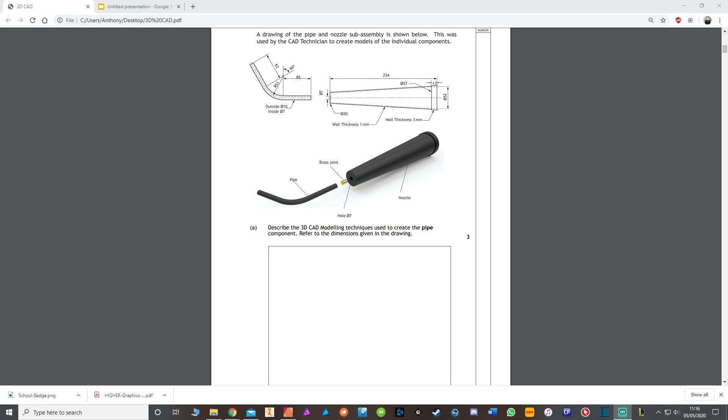Hi everyone, this is going to be a follow-up to my previous video in which I showed you how to do a sweep or an extrude along a path. What I'm going to do is I'm going to take you through an exam question. You see here, this is a 2015 exam, it's the very first question, and it's a pretty straightforward extrude along a path question. So I'm going to break it down like I did before, show you a wee model answer of it and talk about any wee things that might cause problems.

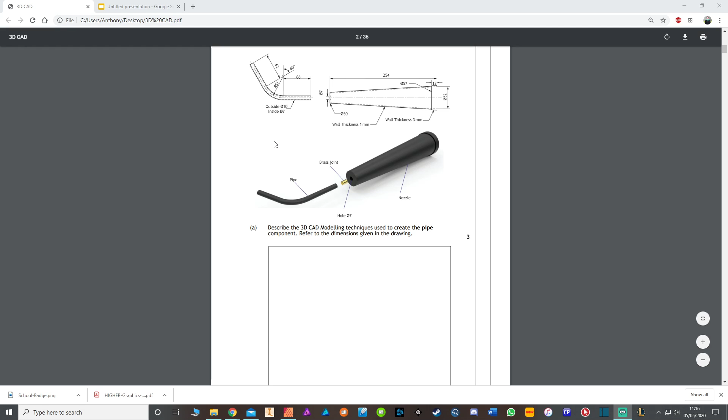Okay. So the first step, as always when we do any 3D modelling question, is we need to define or find what profile it is we're going to draw. So if we have a look, it's this part here that we're asked to draw, the pipe, okay? So if we look at this, we can see that this pipe is an outside diameter of 10 and an inside diameter of 7. That means that there's a 1.5mm wall thickness in here that runs all the way through this.

So the best way to start this one off, if I go back to my answer, is to sketch a profile and have two circles, one at 10 diameter and one at 7. That there is enough to get you your very first mark. So that is pretty straightforward, nothing new there, you're just drawing the profile as we always do.

The next step, if you follow my video, is to then define the path. Okay, what they've done here is they've actually given us the path. All you need to do is produce a sketch of this part here. You don't need to draw all three parts, like the centre line and the two outer parts in hidden detail. You just need to draw the path here.

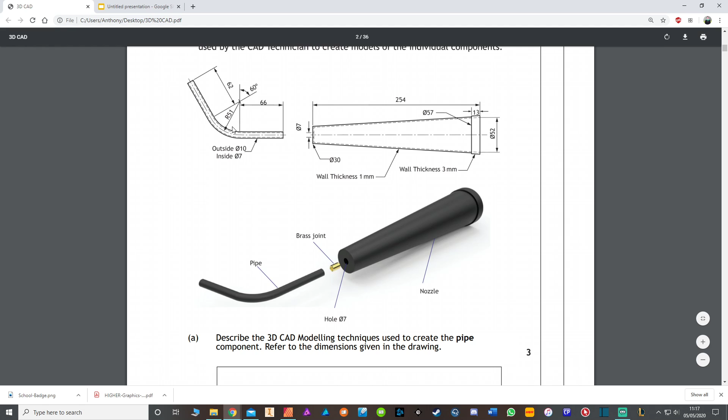Okay, the important thing though when you do this is that you say that you sketch the path on the perpendicular work plane. Make that in bold. If you don't do it in the perpendicular work plane, it won't work. So you have to do that. So as you can see here, I've got a wee sketch just showing the path there. I've got my 62, I've got my radius 51, I've got the length of this part here being 66, and I've got my 120 degree angle there.

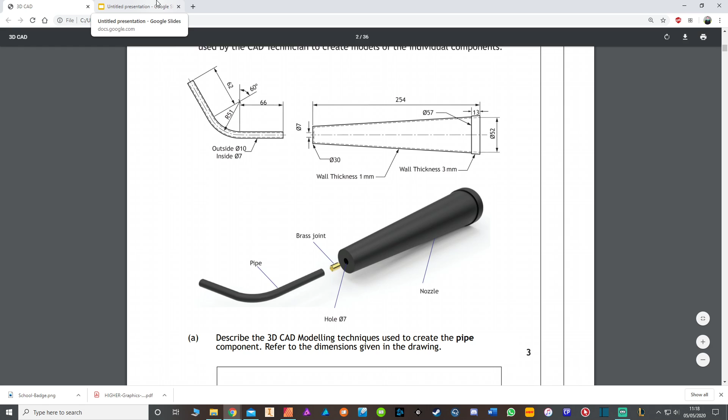The reason I've got the 120 and not the 60 is because if this is 60 here, this part here must be 120, because 180 minus 60 gives you 120. So that part there is enough to get you your second mark. If you don't say it on the perpendicular work plane, you can say that on the plane that's at a right angle to the original sketch, that will also get you the mark, as long as you mention that. If you don't mention that, you can't get the mark.

And then the final command there is to say use the sweep command or the extrude along a path command, selecting the profile, the part of the profile that's the inside of it, so the part in between the two circles, and then select the path. And what that will do is it will give you this here. And that's really all there is to it to get the 3 marks.

The biggest mistake that I see with this question is that people draw the 10mm circle, they don't do the 7mm, they follow all this and they get the pipe but it's not hollow, and then they think that they can shell it. If you look there, this is 10 and this is 7, so if you're shelling this you would make it 1.5, because that's 1.5 there, 1.5 there, and that gives you the 3 difference between them.

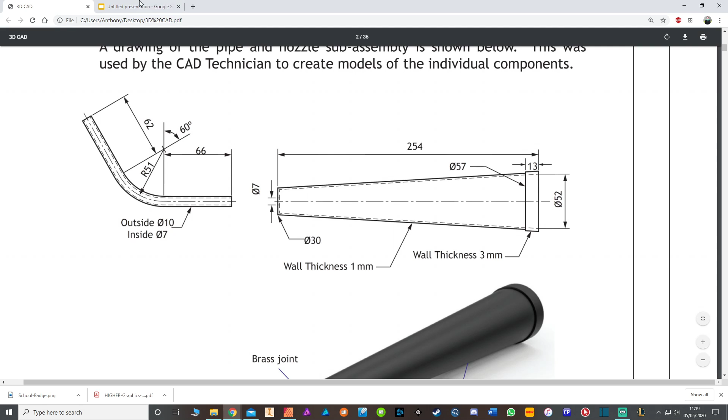However, what it doesn't do is it doesn't hollow, it doesn't go all the way through. So what you'd end up with, it would stop round about here and you would have a 1.5 kind of shell wall thickness for this bottom part here. So that's probably the biggest mistake that I see with that question.

But these questions all start the same. You have your profile, you create the path for it on the perpendicular work plane. My advice to you would be just to copy what you're given here and put all the sizes that are shown here on it. That is the only thing you need to do. And then as long as you say that you're selecting the correct profile and selecting the correct path, then you will successfully do an extrude along a path.

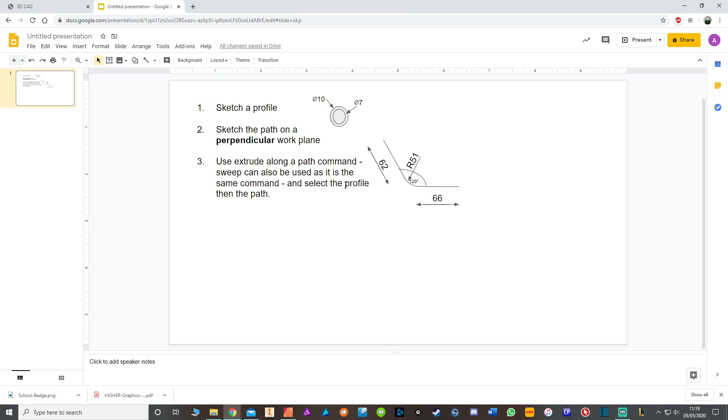Now obviously these can get a wee bit more complicated, but this is just one that I was wanting to show you. It's worth 3 marks there. So that's just one that I want to show you in order to give you a wee start on that.